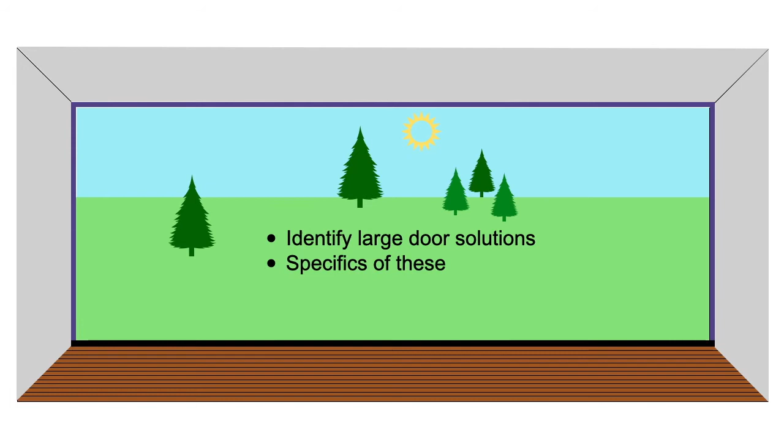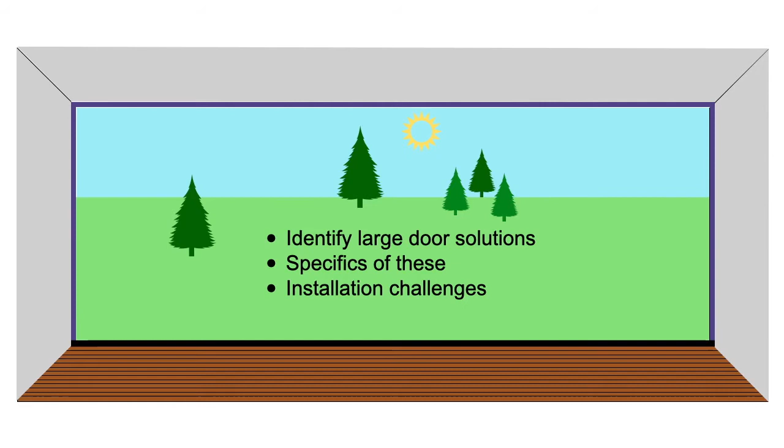After I've addressed this key question, I want you to be able to identify these large door solutions, identify specifics about each door type, and be able to identify installation challenges and precautions of these big doors. We'll dig in just a sec, but first, some new terminology which ties into this segment.

If we look inside a wall, the framing component immediately above any door is called a header, which spans slightly wider than the door. Now don't mistake this for the head jamb of the door itself.

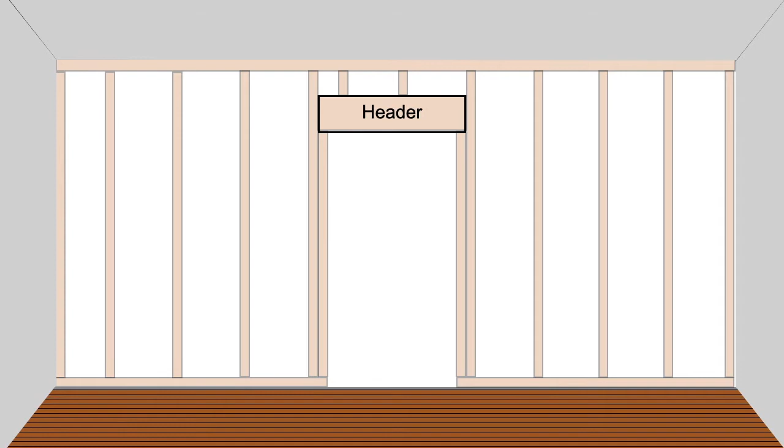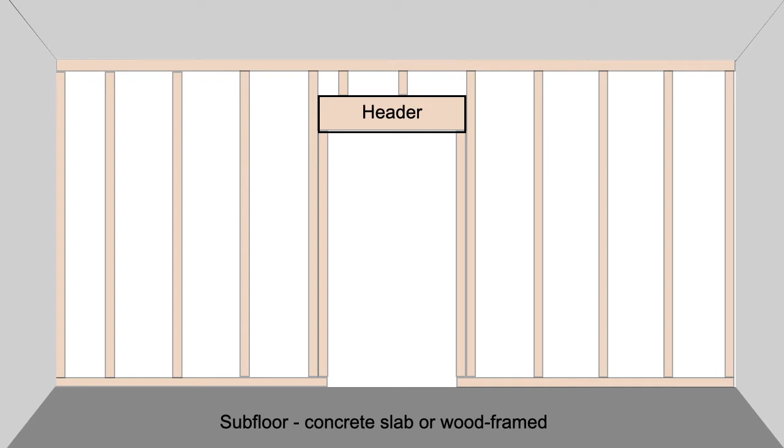Whatever final flooring is in place, hardwood, carpet, tile, or whatever, this is referred to as the finished floor. Underneath the finished floor is the subfloor, which will either be a concrete slab or framed wood. In some rare cases, a concrete slab itself may also be the finished floor, stained concrete, for instance. I'll explain what all this has to do with doors in just a minute.

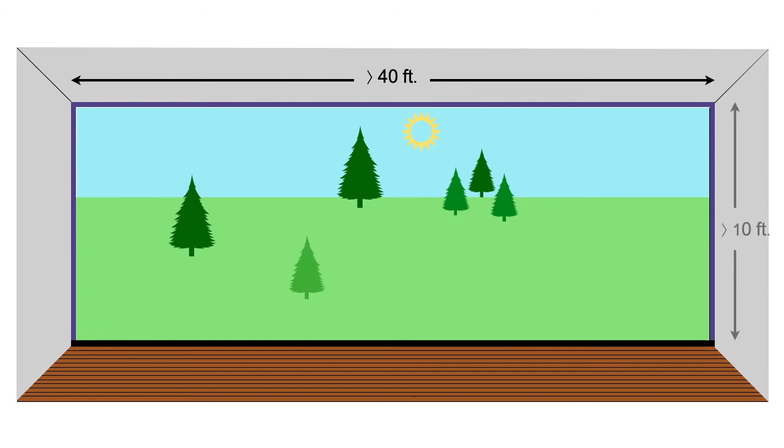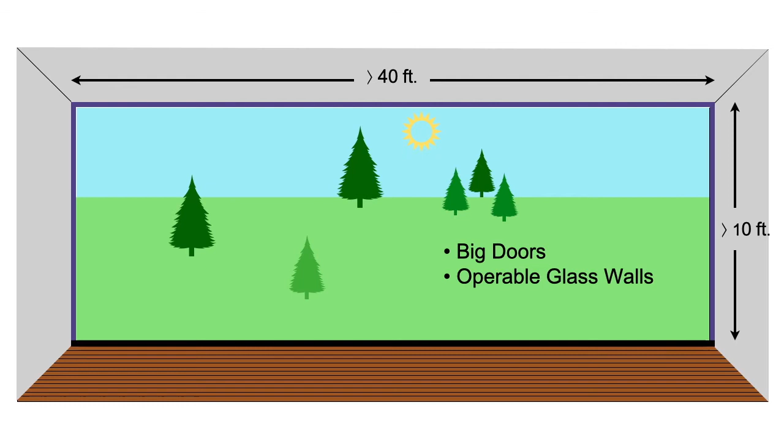Anyway, since you can't just make a conventional door obnoxiously huge for that big opening, the fenestration industry has come up with two new innovative door designs that offer tons of daylight and clear opening by spanning 40 feet or more in width and 10 feet high or taller. Now these are in a league by themselves and are generically referred to as big doors or even operable glass walls. And yet some manufacturers categorize them under their patio door line. But more specifically, these are the multi-slide and the folding or bifold doors.

The first version I'll address is a multi-slide. Unlike a conventional sliding glass door that we talked about previously, the multi-slide version has even more panels, 6, 8, even 10 panels or more. And even then, each panel can be exceptionally wide, 5 feet or more. As big as these panels are, manufacturers have engineered these big door panels with narrow rails and stiles to minimize obstructions when closed.

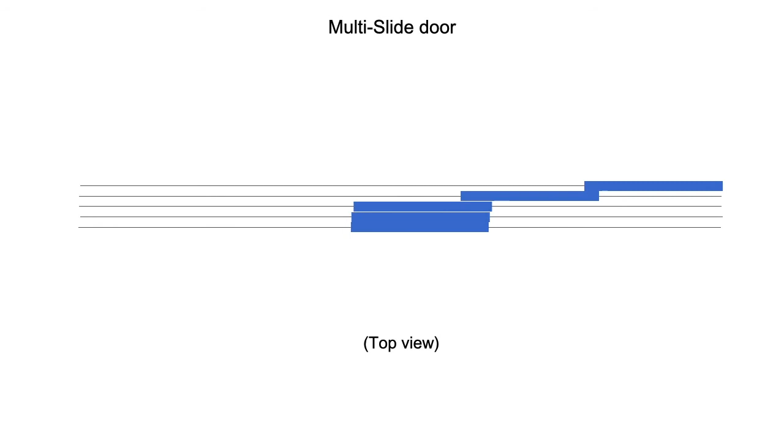The panels are layered, as you can see from this top-down view. Each panel rides on its own track in the sill, so they kind of stack when the door is opened. The stack becomes very thick with more door panels. So as you can imagine, the wall that receives this type of door has to be unusually thick, and of course, planned for.

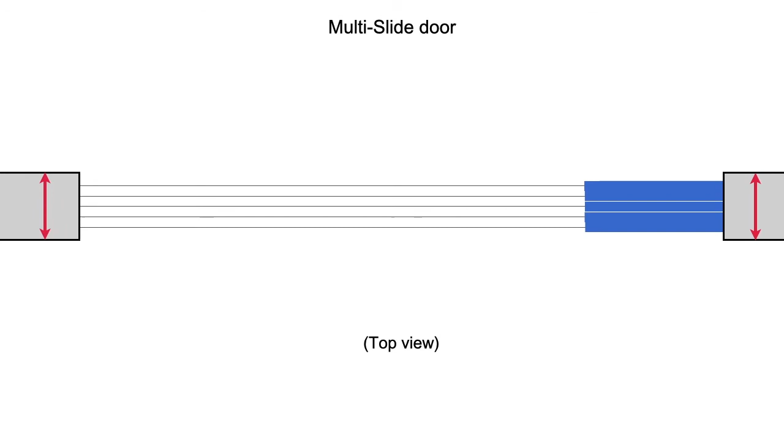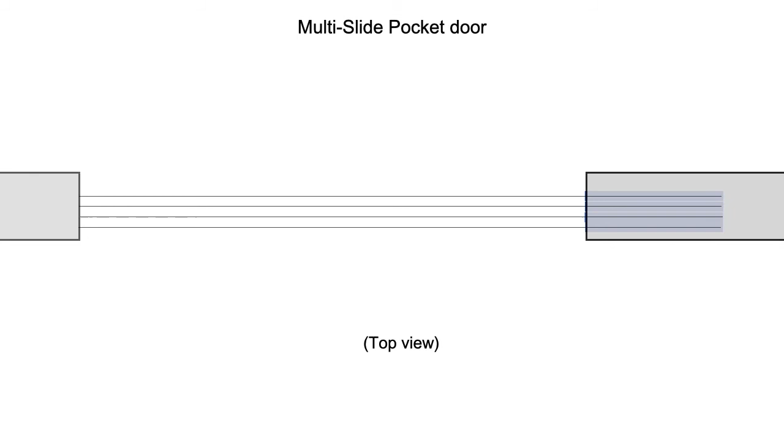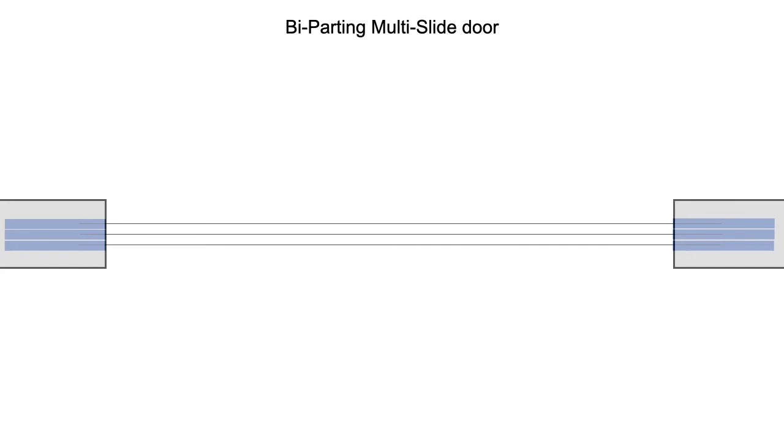Now this is a biparting version, and can be a pocket design too. In this case, pairs of doors share one track, so then the wall depth doesn't need to be as thick, yet you'd still get the same clear opening compared to a one-direction door, all else being equal.

I want to bring up an important point now to avoid a costly error later. Most manufacturers offer sill options for this type of door, and some of these sill options require a lot of advanced planning even before construction begins. A standard sill stands proud of the finished floor, as could be expected. But there is a flush sill option that is intended to have the top of the sill flush in many cases with the finished floor. This flush sill avoids any trip hazard, can be ADA compliant, and simply makes a smoother transition to the outdoors.

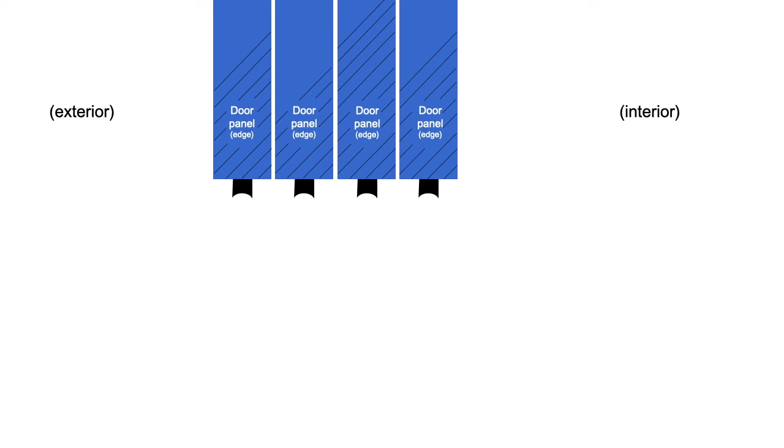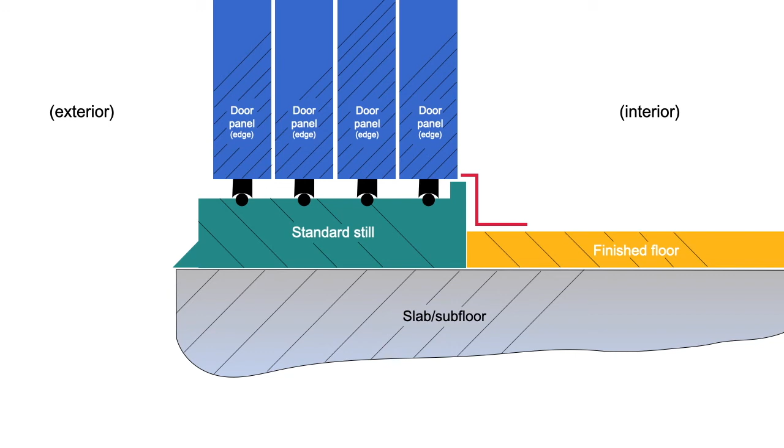But it's more than just ordering the sill of choice, because the site preparation will either make or break the success of the installation. Here's a generic and quick summary of how some work. But of course, manufacturer's instructions prevail. Looking at the ends of the door panels and cross-section of a sill, a typical standard sill installs directly on the subfloor and stands proud of the finished floor. Pretty straightforward. But the flush sill, and this sill is a different design altogether, is flat across the top and might need to be recessed into the subfloor to end up flush with the finished floor.

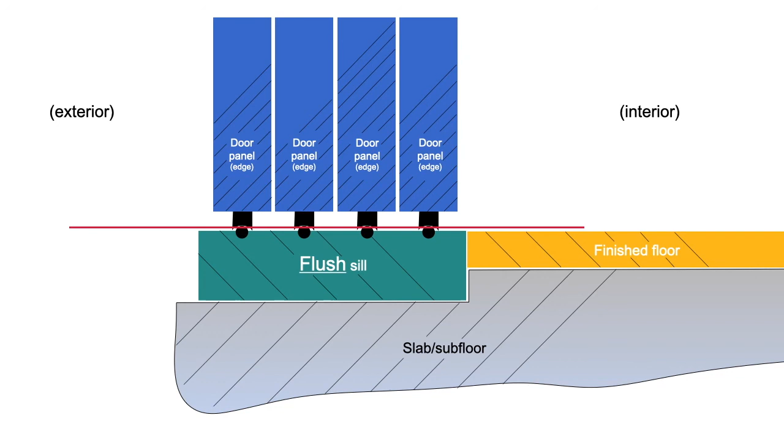Here is where you can see that planning in advance is critical as to how you pour or frame your subfloor or plan your finished floor. It may even be possible to bring the patio also flush with the sill. But since most of these sills drain internally and must have an exit for the water, proper sill drainage needs to be allowed as detailed by the door manufacturer. This flush sill door design is a great option for new construction, but might not be practical for a retrofit. Well, let's see what you've learned up to now.